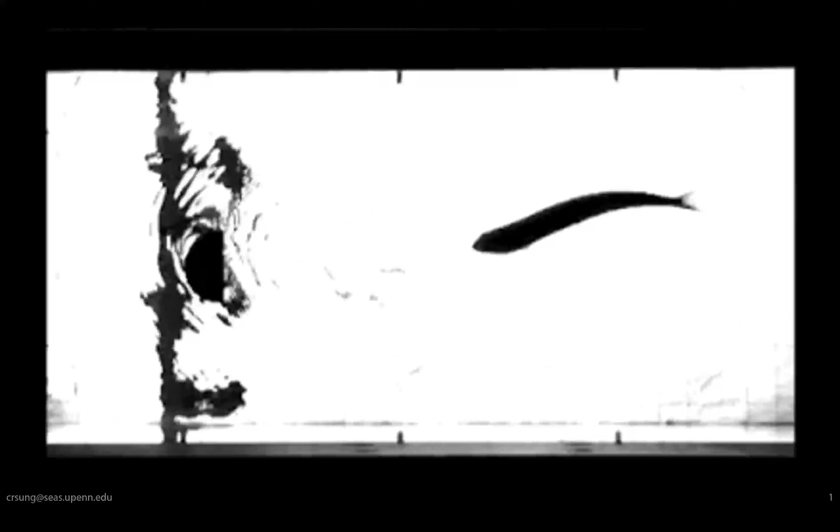So when I show this video... Maybe there's a chance of getting people in the room to use the owl to say things. Manuel, is it on? Or is everyone quiet? The owl is on, but we only have one spectator in the room and the rest are online. Oh, I see, okay, don't worry about it. People online should feel free to jump in, and if you have questions throughout the talk, please feel free to interject. I don't mind, but I'll just keep going.

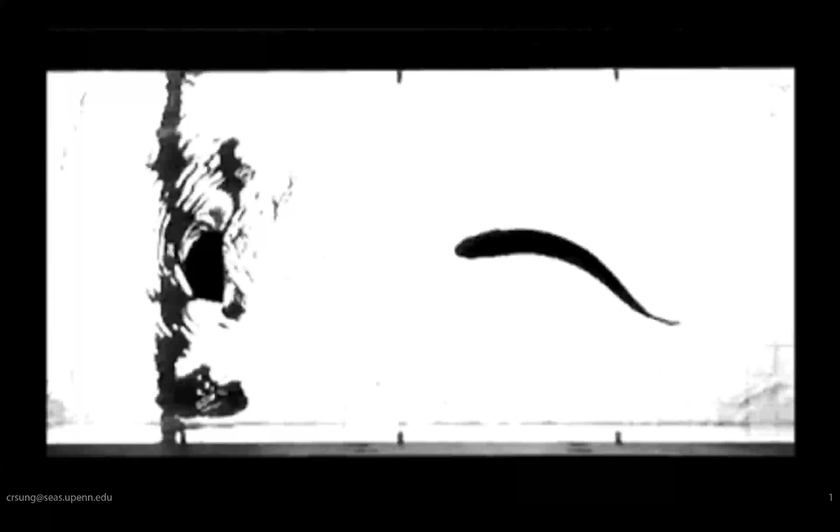When I show this video, a lot of times with no context, people say this is a black and white video of a fish, swimming upstream, hitting this rock, getting thrown off course, and then restarting. But what I want to do now is show you the title of the paper this video came from: Passive Propulsion in Vortex Wakes.

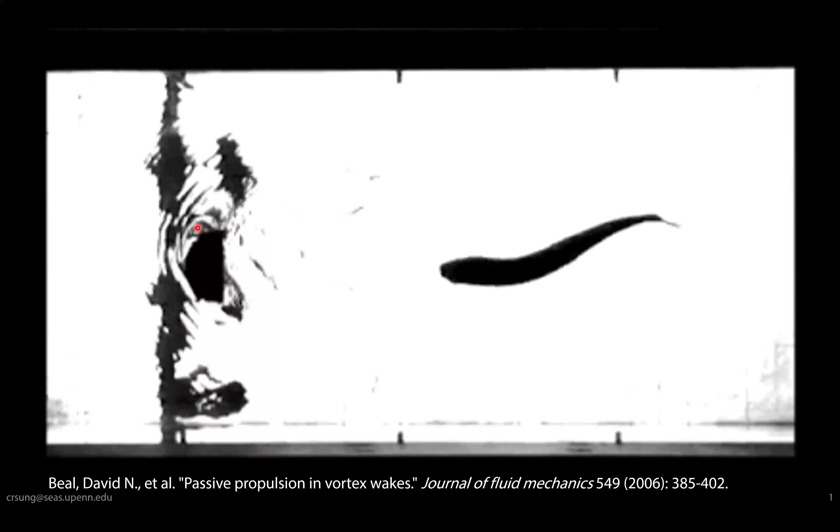This was a piece of work from 2006, where this is not just a fish that's swimming, this is actually a dead fish. What's happening here is that this fish is attached by a string at its nose to a point on a fake rock, and there's a flow being generated in this environment. The interaction between the flow and the fish's body creates this oscillating motion that, with no active control and no actuation at all, allows this fish to swim forward.

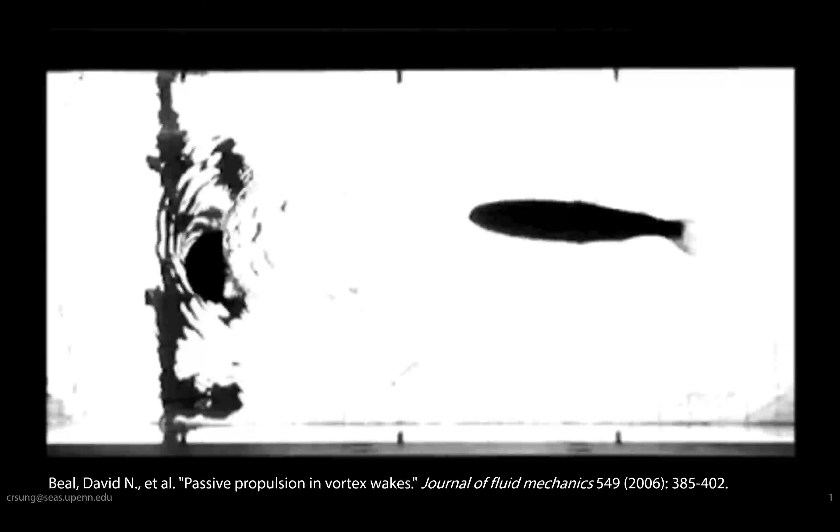So there are really fascinating questions here about how we can get efficient swimming, efficient underwater robotic locomotion, by taking advantage of really good design.

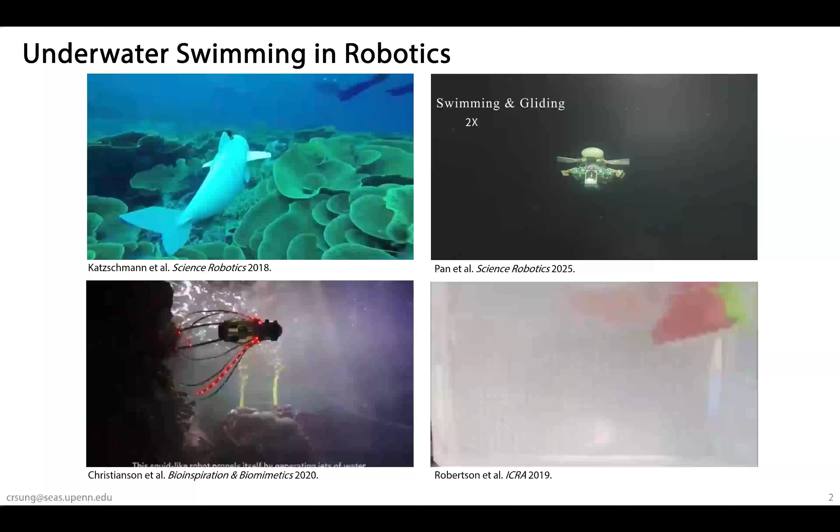In the context of underwater robotics, there have been quite a few pieces of work, including those by people in this room, looking at how we can create new mechanisms, new actuation strategies, and new control strategies for getting robots to move around in 3D underwater environments. A lot of these works are biologically inspired, many have soft components, and many have really complicated actuation structures that allow them to create motions mimicking what we see in biological systems.

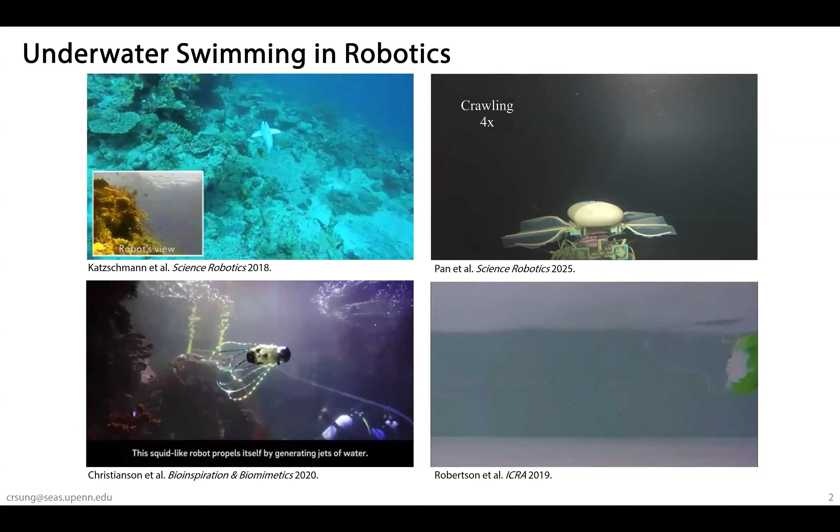At the same time, designing underwater systems is really challenging precisely because of how the robots need to interact with this fluidic environment to do these tasks—not just succeed at them, but succeed in doing them efficiently and agilely, in ways we can actually use for real robotic tasks. So the premise behind the work we do in our lab is really about this interaction between the robot and the environment.

In particular, we believe that robust and efficient task execution comes from the interaction between the two. Generally, when we think about robotics, for example in a more commercial or industrial context, you have the environment and the robot, and we think about planning and design in terms of how we get the robot to do work on the environment—how do we get it to do pick and place tasks, how do we get it to navigate around obstacles, that sort of thing.

But in a lot of locomotion tasks, the environment also has a huge impact on the response from the robot itself. This loop between the robot and the environment requires us to be able to reason about it, which is key to designing these sorts of systems.

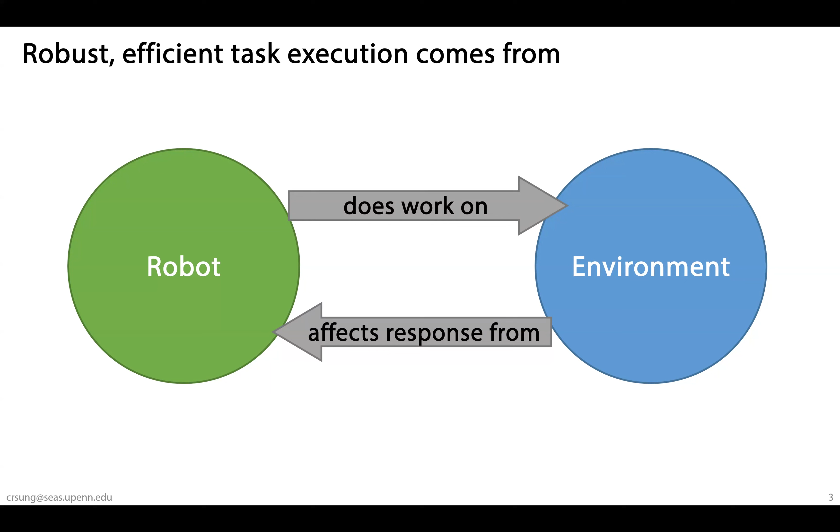So we take a look at this loop. This is what we call embodied intelligence. And in particular, when we think about computational design or co-design, or just how we approach trying to create these sorts of systems, we want to reason about how we manipulate those responses.

So going back to this video, the sorts of questions we think about in our group are really about trying to manipulate this interaction. The questions we think about are: what is the shape and morphology that is useful for this, for whatever task we care about? In the context of this fish, there is a particular shape it has evolved into that allows it to be streamlined, reduce drag, and create these oscillating motions in its body.

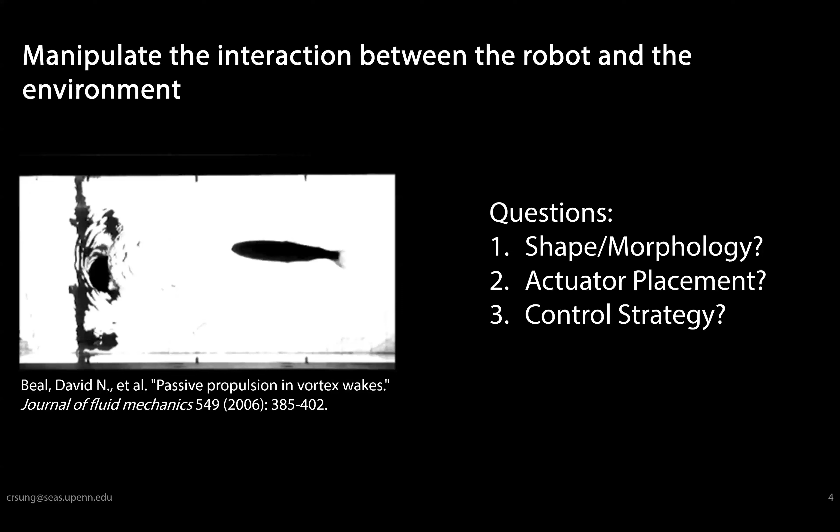There are questions that have to do with what actuators we need to use, where those actuators are placed, how many are required to get the sort of motion we care about, and what control strategies are associated with the actuators and the higher level design of the system.

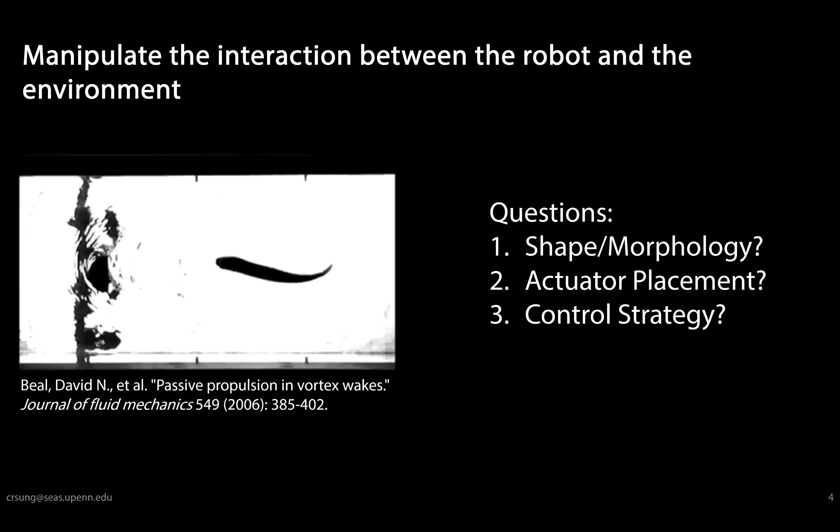Our lab has investigated these questions in the context of many different platforms, usually looking at pairwise interactions between these elements. We've done some work in origami-inspired design, where we can embed electronics, actuation, and sensing directly into the robot body. But then there are really interesting questions about how the mechanics of the robot change when you embed those components, and how that affects your actuation strategy.

We've done some work in how we can co-design over the mechanics and control of a robot. What you're seeing in the bottom left is a legged platform, where we've been interested in how we can tune the compliance of an origami structure and how that affects the robot's passive response to a ladder-like environment. We can do passive grasping as a robot might be jumping or running over this sort of terrain.

We've been looking at questions in actuation and interaction between robots on complex environments. This is a sandy environment meant to simulate lunar terrain, where we have two robots connected to each other, attempting to use an arm between them to apply forces to each other and help each other.

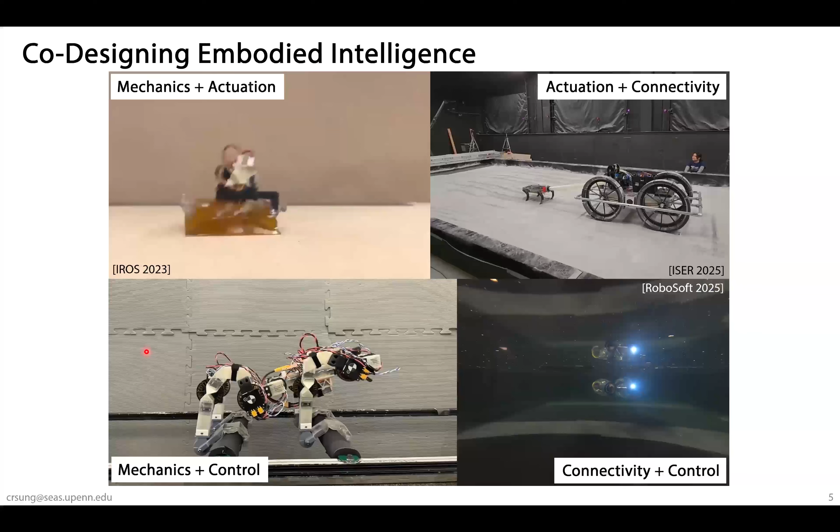Oops, what is going on here? Sorry, my computer was spazzing out a bit.

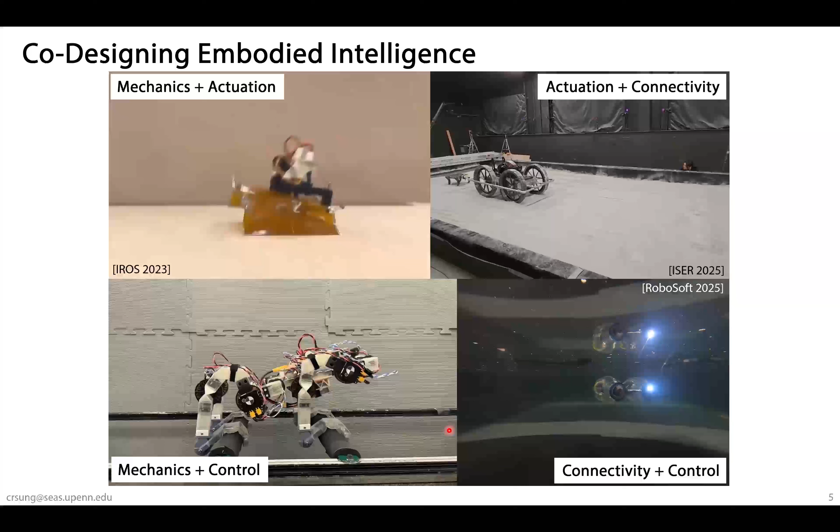A lot of times when I present this work, students ask, well, where do these platforms come from? And how do we know these are the platforms we want to use to answer these questions? Honestly, the answer is that a lot of these projects come as a result of conversations and really spontaneous interactions with other researchers.

So where we started a few years ago was not really in underwater robotics at all. Our group originally worked almost exclusively in origami-inspired design. At the time, we had been thinking about how we could design more robust, larger scale origami structures compared to a lot of the origami robots that existed, which were restricted to about the centimeter scale. So we did some work in origami mechanics.

It turns out that in order to tune the compliance of an origami structure, you can take advantage of ideas from computational geometry that tell you that for certain types of structures you might want to fold, there is a requirement that there will be stress, or strain in the faces of the origami pattern, when you deform that pattern. There's a class of origami structures that are what we call rigidly foldable, where you don't have any deformation in the faces.

And there's another class which are non-rigidly foldable, where strain is required in order to deform. This is known as the Bellows theorem, where if you have these enclosed polyhedral surfaces and try to compress them, no matter what you do, you cannot design a rigidly foldable structure. It turns out that you can actually design and model these structures to change the force response when you apply that sort of deformation.

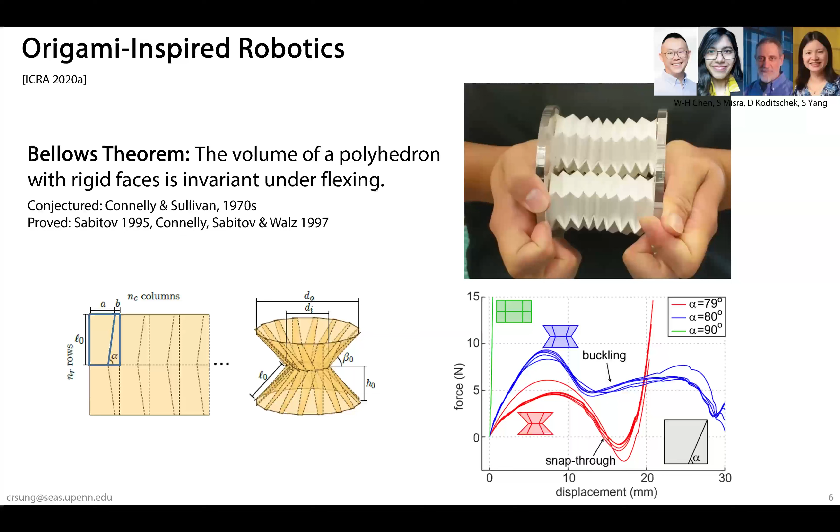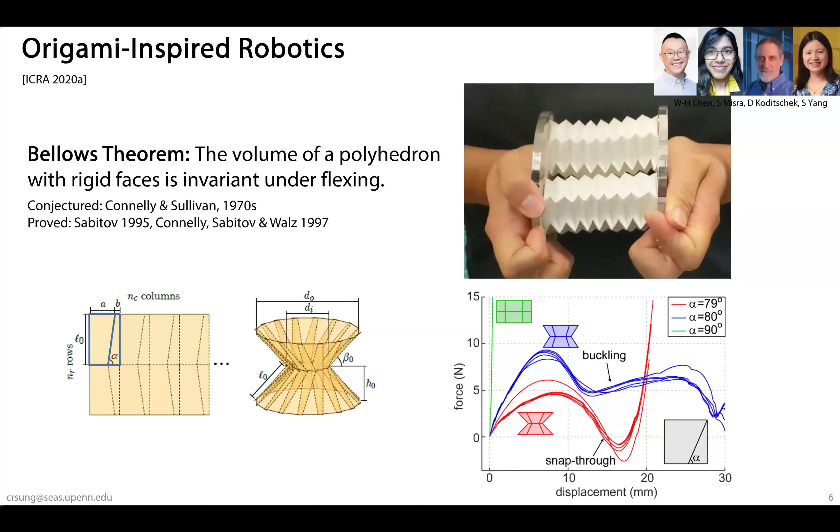So we had been exploring this idea in the context of legged robots, trying to see whether we could store and release energy into these robots with enough speed and power to get kilogram-scale running and jumping. But at the same time, there was another group in Korea looking at a completely different pattern.

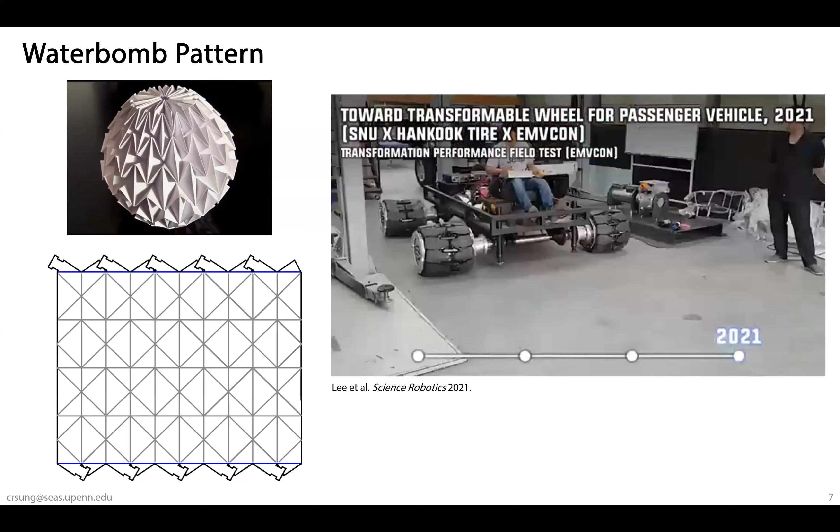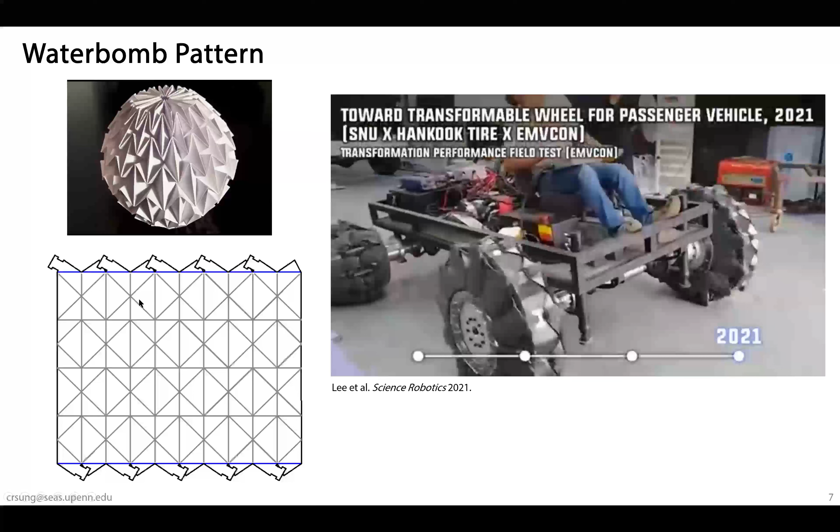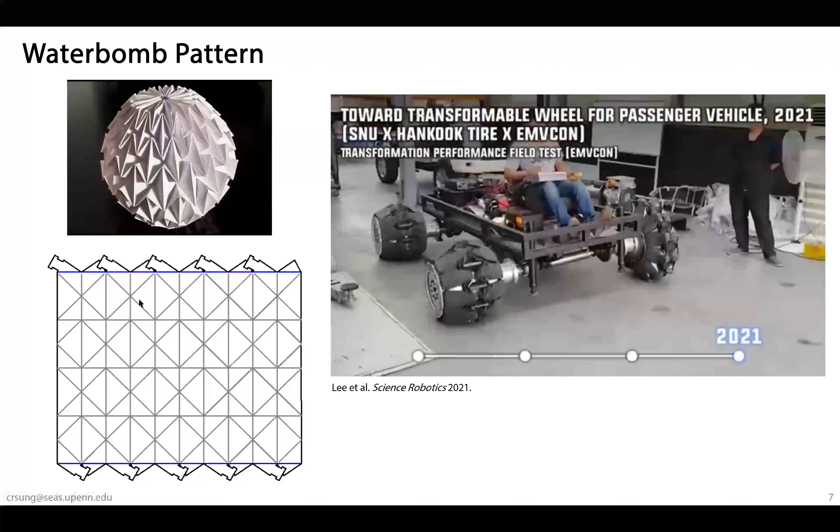This is the magic ball pattern, a tessellation of waterbomb units. They were designing transformable wheels to also scale up origami design, in this case for the purpose of designing a car. We looked at this pattern and said, this is actually also subject to the Bellows theorem, where you see that it's an enclosed polyhedral pattern.

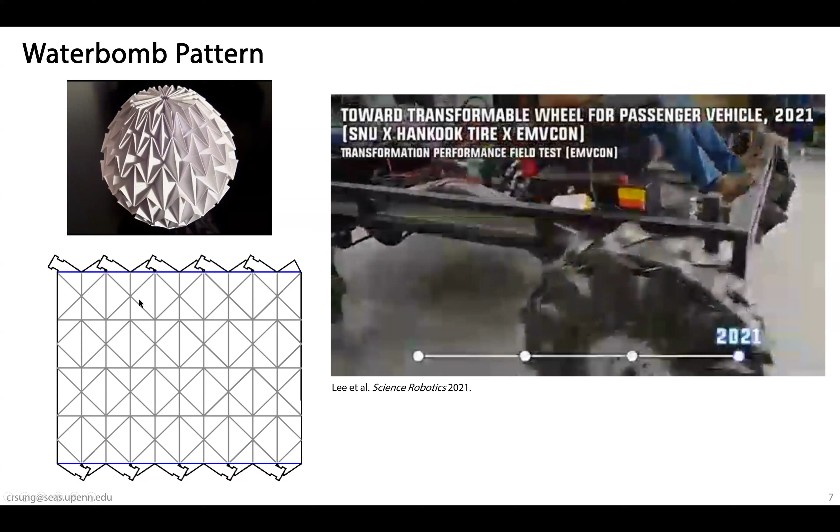It's being compressed lengthwise to get this wheel to grow and shrink, which means this pattern is also subject to these ideas of storing and releasing energy into the pattern itself. One of the students in my lab became very interested in this pattern.

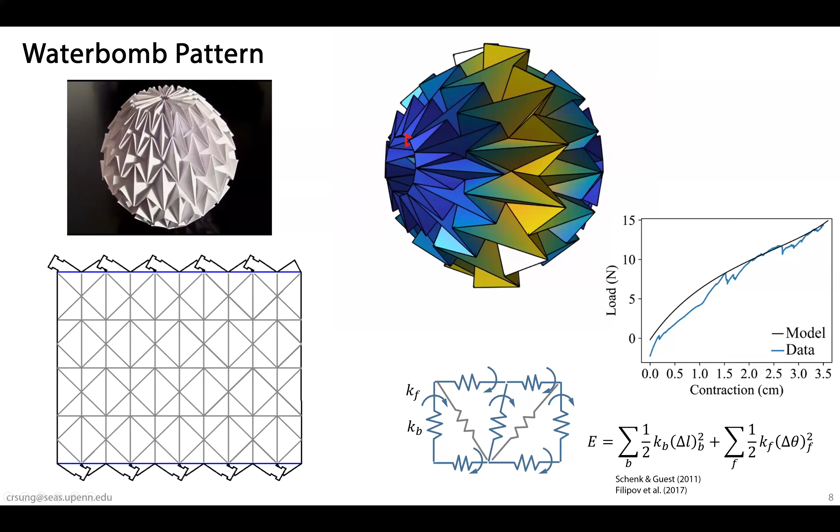So they got very excited about this and said, let's see whether we can turn it into something interesting. It turned out that what they were interested in creating was an underwater robot.

So this is the magic ball that we had four years ago now, where they designed this tube that had a DC motor and a spool inside. The spool is connected to a tendon that exits the tube through this side, and then connects to an end cap that we attach to the other side of the magic ball.

What you're seeing down here is the actuation structure. So we have this DC motor, this spool. This spool has teeth on it. And so by moving this spool out and in, you can engage or disengage the teeth.

What happens then is that when the teeth are engaged and the DC motor turns, you can contract the magic ball. And then when you disengage the spool and release the teeth, because of the natural mechanics of this magic ball, it will passively return to its extended state fairly quickly.

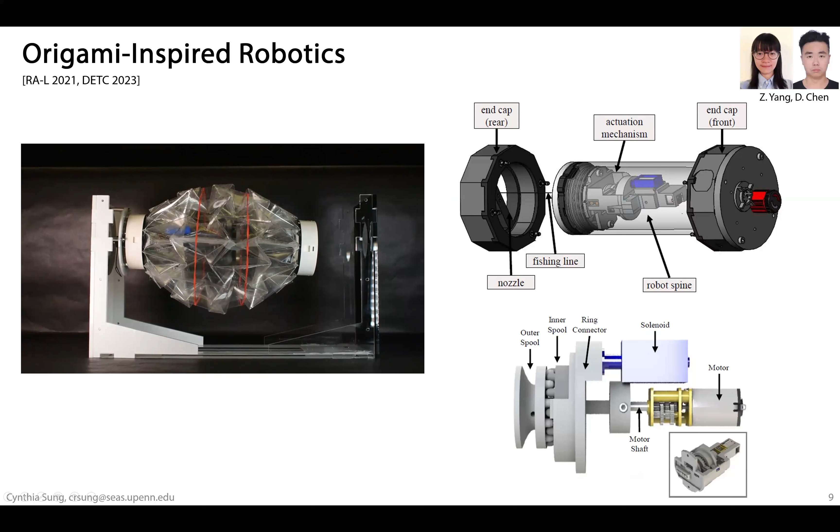What's also really interesting about this pattern is that during that process of compressing and expanding in length, the volume changes. So now when you put this robot in the water, you can get this jet-propelled swimming.

So this was the first version of our underwater robot that we built, where we had this magic ball pattern made out of PET plastic. We laser cut the pattern by perforating where all the folds were, then folded it by hand and attached it to this actuation mechanism. You can see here that it's able to contract and then release very quickly to create this jet.

This bar that you see at the top is just a radio that we were using to stream the data back so that we could actually measure its performance.

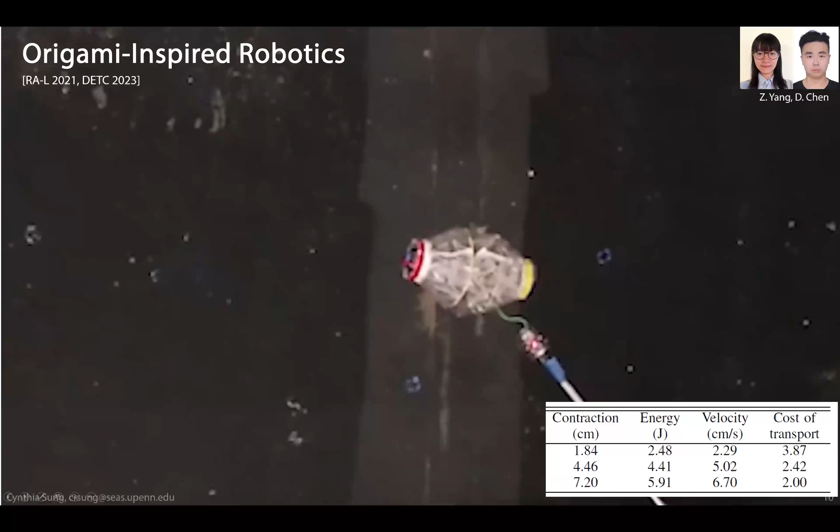The robot is fully untethered and able to execute this jetting motion on its own. When we measured the velocity and cost of transport of this robot, we were surprised because it turned out to be very similar to squids of the same size. So we were really excited and asked, are there other interesting questions we can answer in underwater propulsion?

Of course, you may be looking at this robot and saying it's not very good, because the use of the origami skin gives us this nice feature of creating the jet through the passive mechanics of the skin. But actually this skin has a lot of divots in it, which increase drag.

So the very first thing we did while trying to enhance the system was basically get rid of the origami design. So even though this project started as an origami-inspired project, it no longer is. This is the new version of the robot, recently presented at RoboSoft, now with an elastomeric skin with bending beams, using the same actuation mechanism where we spool to contract the robot in length, then use the passive mechanics to quickly create the jet. Because the skin is smooth, we automatically get much higher velocities and much lower cost of transport. So this is the state of the robot right now.

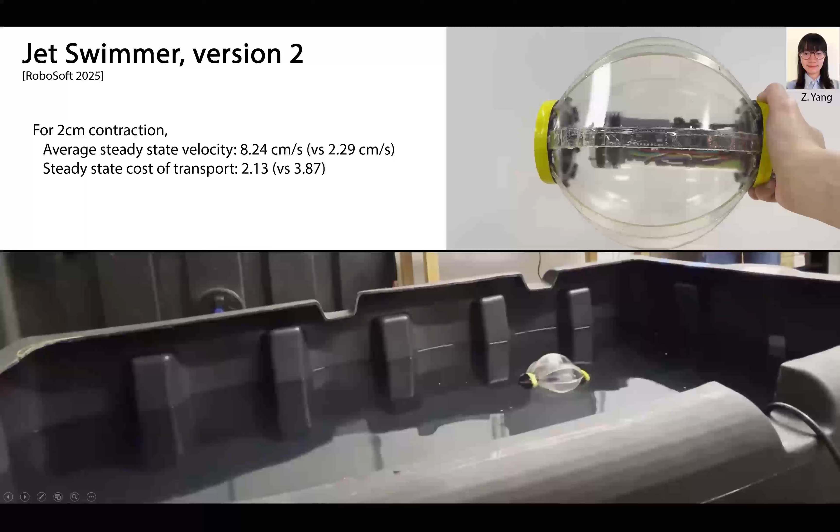At this point we're in this space of underwater robots I showed at the beginning, where this is just another mechanism you can use for swimming. So the question is, what do we want to do with this system? This is where conversations with people who aren't necessarily in robotics come into play, because we showed this video to a colleague in my department who really likes surfing.

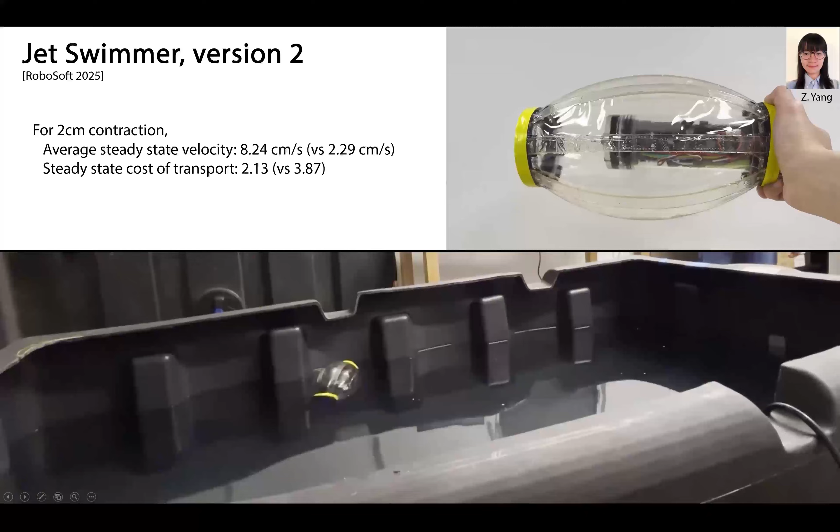And he said, this robot looks very much like a salp. Salps are these underwater jellies that are tubular. Their bodies are basically entirely soft, and they have a front and back aperture where they suck in water through the front and expel it through the back. So the water flow looks like this. They have a membrane in the middle that they use to filter the water and to feed. This process of moving water through their body is used both for locomotion and for feeding.

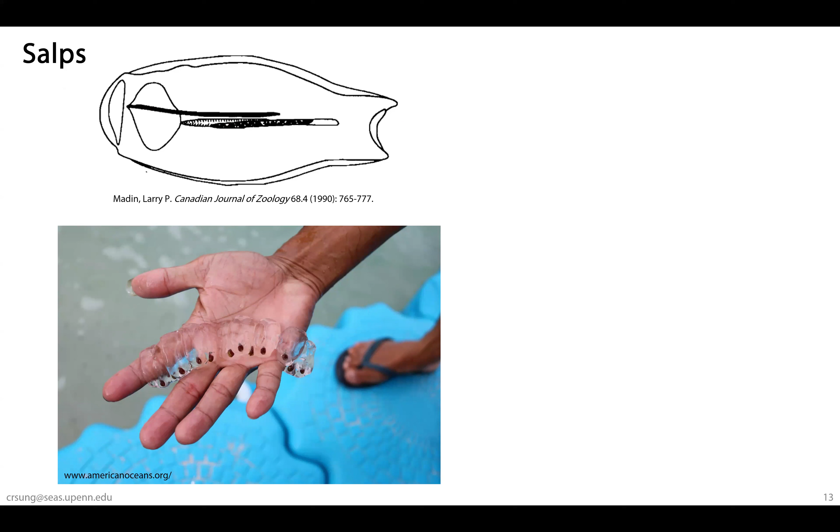What you're seeing down here is a picture of salps on a person's hand, so you can get a sense of scale. These creatures are somewhere between 1 and 10 centimeters in length, and they're considered some of the world's most efficient jet-propelled organisms.

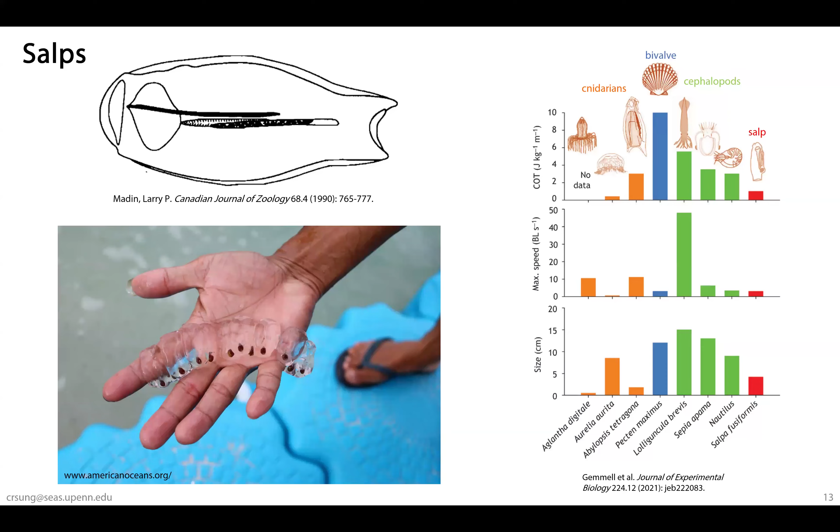When you look at a salp as a jet-propelled swimmer, they can swim in solitary mode, but they can also swim physically connected to each other. These colonies are actually the way that they reproduce. When salps reproduce, they make copies of themselves attached physically to each other, creating really long salp chains up to hundreds of units long, and swim as a group.

Now, they are actually individual organisms with their own nervous systems. They have the ability to detach, and they do detach when they're trying to escape from a predator, for example.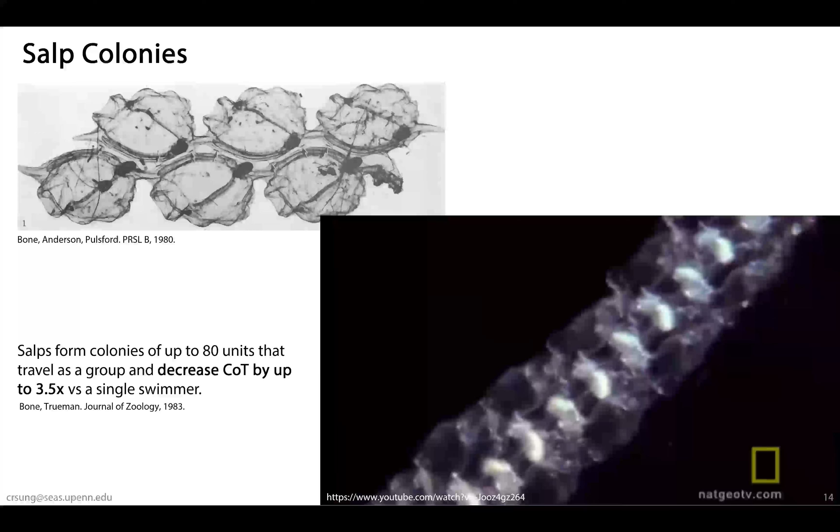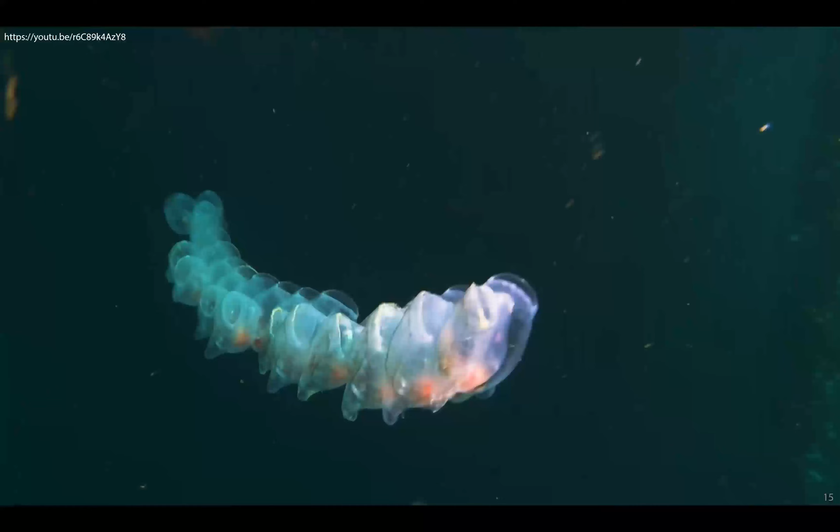When they are attached together, they exhibit really interesting locomotion modes, in that they jet, but don't necessarily jet all in synchronicity. So I'm going to show you another video of a salp chain.

There's some really interesting control insights we can gain from observing this video. One is that there's a really long chain with a lot of units creating these jets, and this chain is not uniform. In robotics, we often think about symmetric designs, maybe lattice structures, which allow you to be very optimal in your design. But in this chain, there are units missing, and not all units are perfectly aligned with each other.

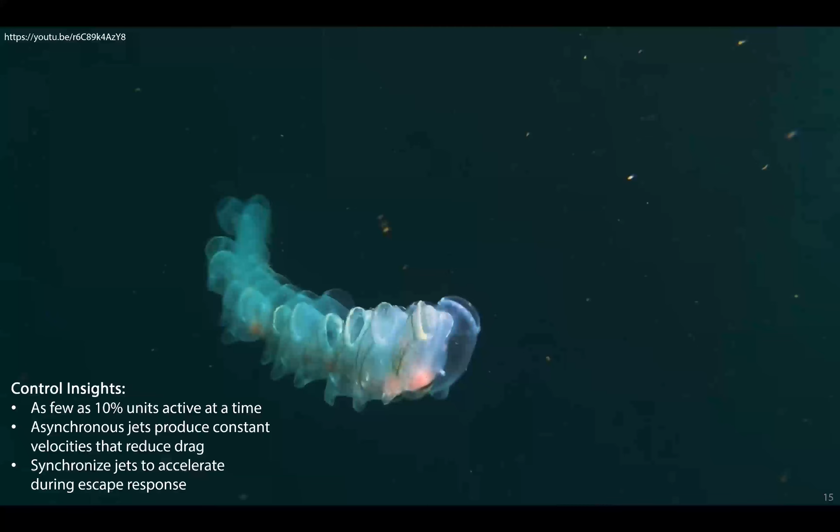And yet this chain still moves effectively. The other thing you might notice is that not all units are jetting. In these systems, even though the whole system has 80 to 100 units, as few as 10% of them are jetting at a single time, meaning the rest are just hanging out and along for the ride. This allows the entire system to potentially lower its energetic cost.

The third insight I want you to notice is that the ones that are jetting, that are active, are not all jetting at the same time. There's this other very common mode of control in multi-robot systems, which is that we want everybody to synchronize, or reach consensus. We think that figuring out how these robots can reach consensus will allow us to get better or more interesting performance in a multi-robot system.

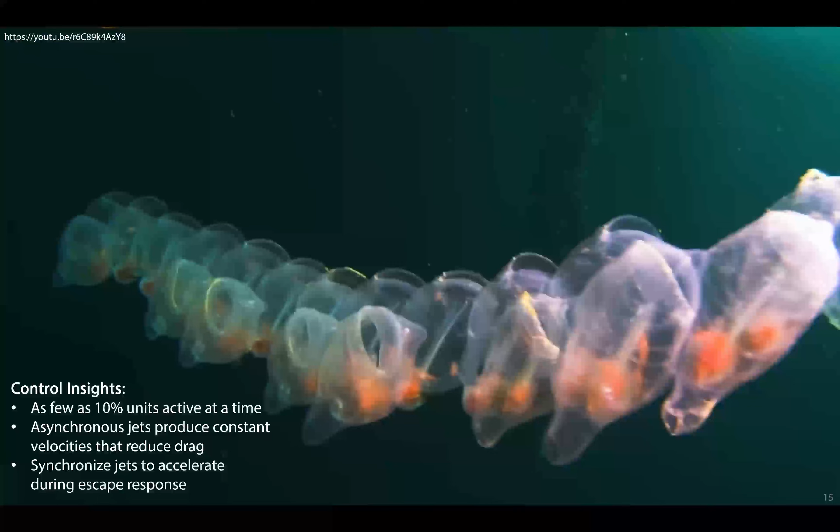But actually in these sorts of underwater systems, these biological systems don't all jet at the same time. These are interesting features of biological systems that may tell us something about how we can manipulate the interaction between swimming units and the environment.

I'm bringing back this slide that I originally showed for fish, but all these same questions apply to this salp chain: a question of shape and morphology, like how many units are actually required for this sort of system to be effective, and actuator placement — what are the physical arrangements of units connected together to create these chains?

And in terms of control strategy, what is the level of coordination that is required? And if coordination is required, since it's not about getting all of the units to synchronize, what is that coordination?

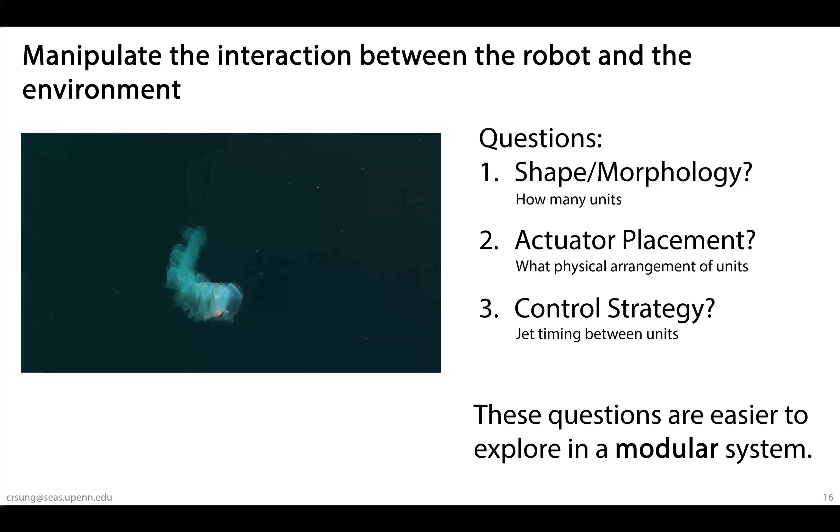These questions are, I think, much easier to explore in a modular system than in a fully integrated fish robot, in the sense that now we can take individual jetting robots, connect them to each other in different ways, and explore these questions without having to redesign the entire thing. This is how we started on this quest for understanding multi-jet locomotion and the interaction between the robot and the fluid.

One interesting observation we've had along the way is that there's a relationship between work happening in multi-robot systems and work happening in soft robotics, in the sense that I transitioned from fish to salps. If you think about this salp colony as having a single control system, it's basically like an eel-like structure, with distributed actuators throughout the entire colony.

How do we think about shape or design? How do we think about actuator placement and actuator design? These are questions that show up both in multi-robot systems, where there's been a long history of work, and in soft robotics, where we may not have thought about those questions so much, but we can learn from multi-robot systems to make more efficient designs. So we want to explore these sorts of questions.

We've been gaining a lot of inspiration from biologists. It turns out that in the United States, at least, there is really only one salp biologist. Her name is Kelly Sutherland. She's been looking at these multi-jet systems for years, trying to understand how the number of units, the coordination between units, and the morphology of units affects their motion.

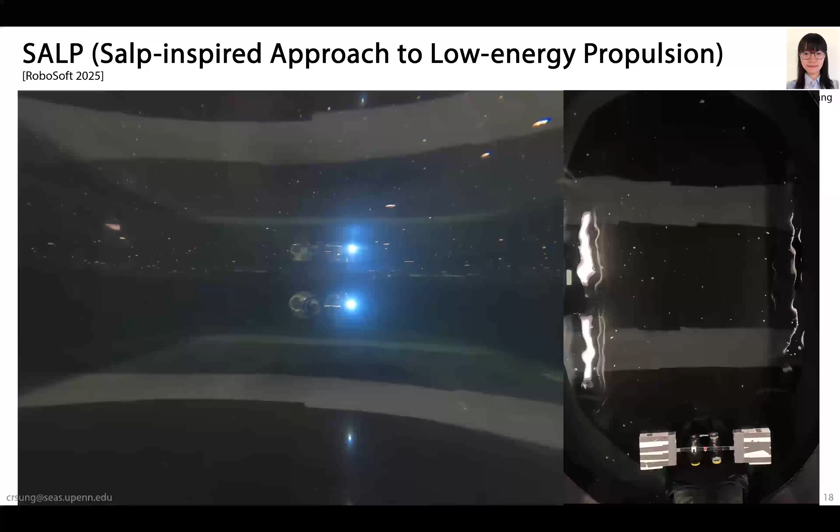So we rebranded the project. It's called the Salp now. Salp stands for Salp-Inspired Approach to Low Energy Propulsion. We're trying to see whether, with this two robot system, we can see similar effects in the coupled interaction between physical arrangement and jetting control.

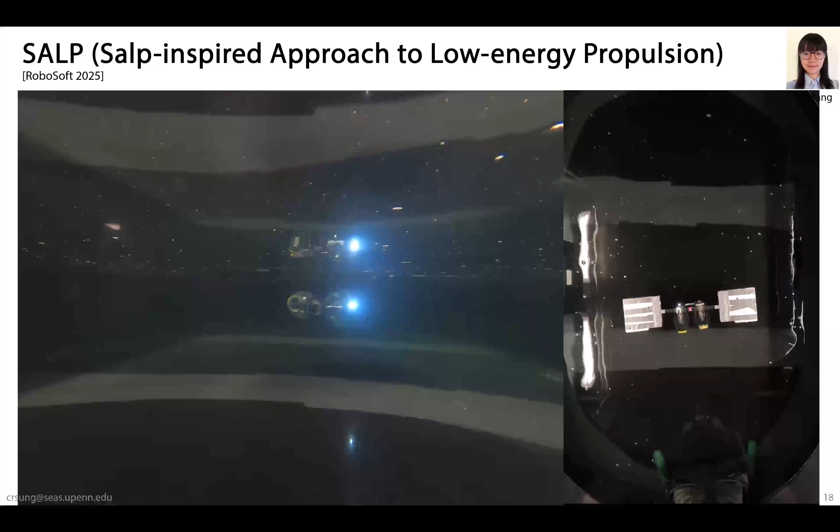So this is the robot, two of them connected to each other, swimming underwater. What you're seeing on the right is an overhead view of the robot swimming in our tank. This robot naturally floats, so we have to weight the system down and put it on a piece of foam just to make sure it stays basically so we don't have to deal with buoyancy control right now. We can really just look at the effect of jetting.

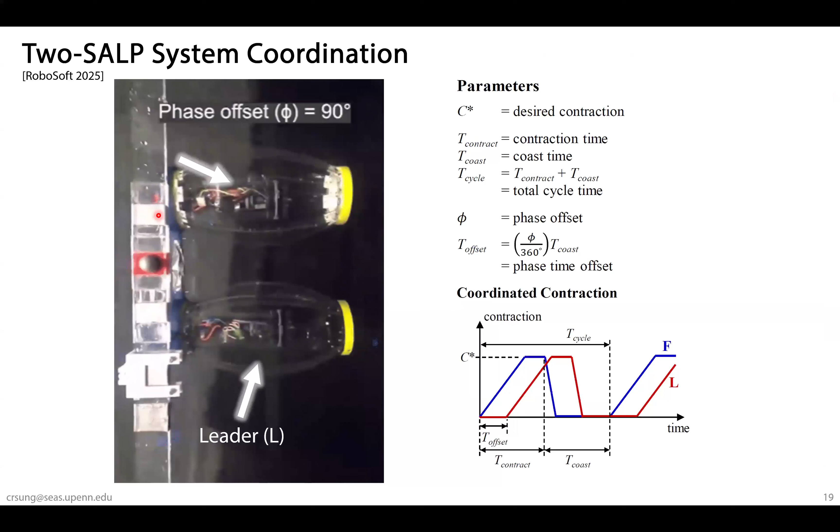The way we're connecting these robots together is by putting this rigid attachment in the front. There's a collar here that we're using to attach the front of the two robots. Through this collar, there's also a wire that connects the two robots electrically, through which they can communicate with each other and set their phase offset.

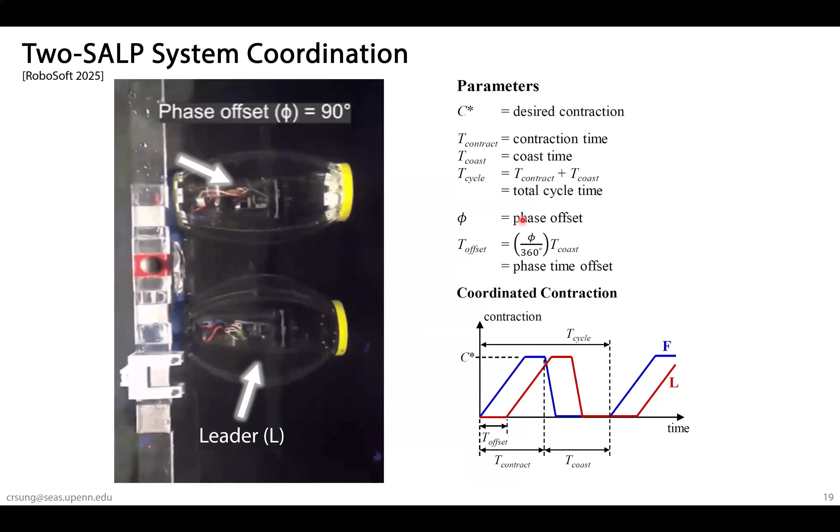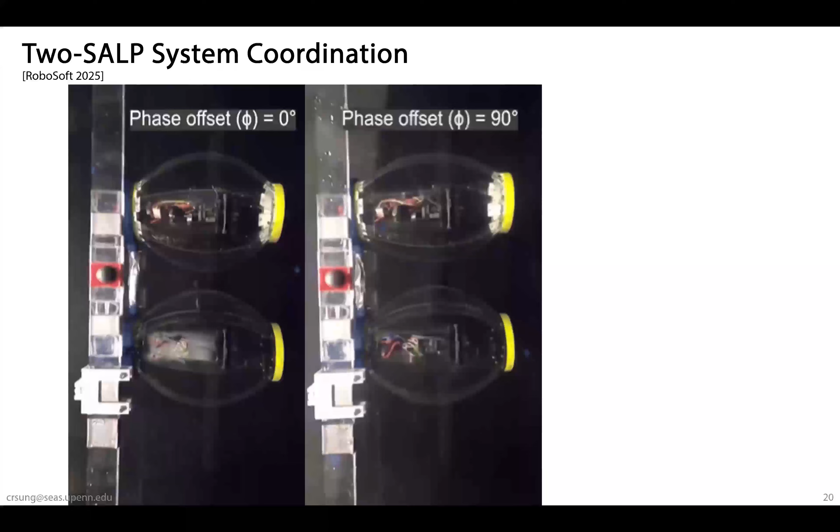Each of the robots is executing this cyclical motion of contracting, holding, and then releasing. This release component is the robot creating the jet. We have a leader robot, which sets the timing for the jetting cycle, and a follower robot, shown in blue here, which lags by some T offset, which we also indicate by phase phi. A phase of 0 degrees means the robots are jetting exactly in sync, 90 degrees means they're a quarter of a cycle off from each other, and 180 degrees means they're jetting exactly out of phase.

Now we can take the system, put it in a tank, and see the result on swimming performance. What you're seeing here is side-by-side comparisons of these two robot systems swimming. You should notice differences in speed, so some of them are swimming faster than others. There are differences in turning, so some are a little bit better at swimming straight than others. And there are also some systems that are oscillating more or less than others.

We've done this experiment over multiple trials and extracted average performance metrics. What we find is that the steady state velocity, power consumption, and cost of transport all depend on the phase offset for these two robot systems. Velocity and cost of transport have to do with the interaction between the robot and fluid, so that kind of makes sense. But what I found really surprising is that the power consumption, this is electrical power consumption from the motors in the robot, also changes as a result of this phase offset, meaning whatever is happening between the robots and the flow is increasing or decreasing the power and force the onboard motor needs to generate to create this locomotion.

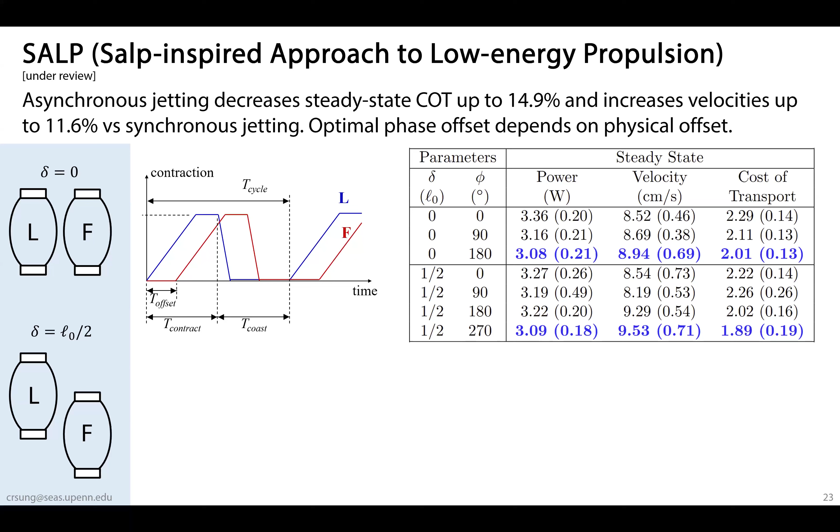Talking with Kevin, they haven't really taken a look at this in the salp colonies, because they just look at whether the units are synchronized or not. It's difficult in biological systems to really tease out the effects of morphology on these different units.

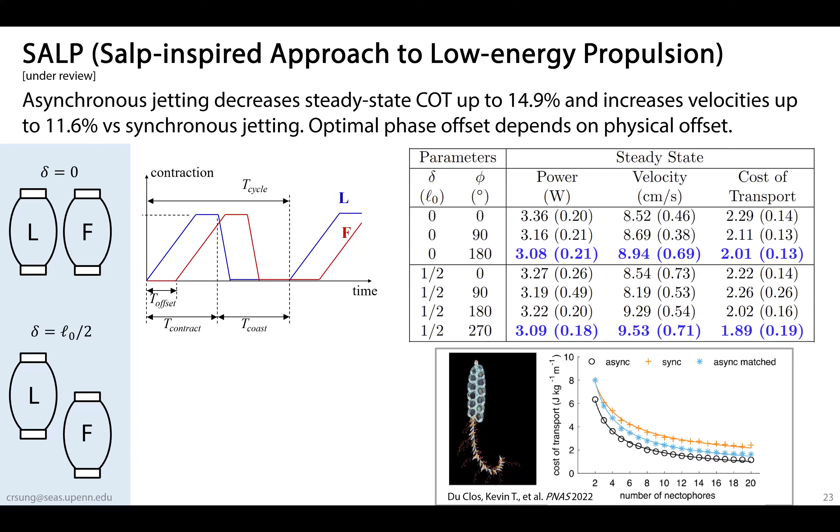So we wanted to investigate this idea further, and looped in one of the fluid dynamicists in our department who said, let's take a look at what the fluid flow looks like. These, I think, are our most interesting results from this project.

So we took the robot and put it in a particle image velocimetry system. This is basically a large tank where you drop in a whole bunch of neutrally buoyant, very small particles, then illuminate them with a laser. When you take a video of the system, you can see the movement of the particles as they follow the fluid flow.

So what we think is happening is that as the robots are jetting, these vortices are interacting with each other, and that is actually what's creating the change in performance for the robotic system.

So what you're seeing now is our latest experiments on the two robot system, the aligned system. We have two robots right next to each other. On the top video here is what happens when the robots are jetting in phase with each other.

What you see is also similar to what you see in the single robot system. You see the jet being emitted and traveling to the right. You see these two circulating fields coming off of the jet.

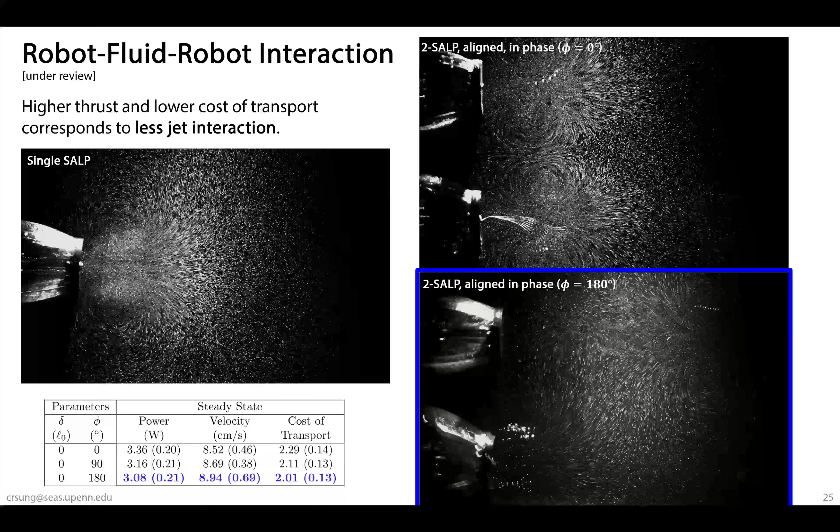I'm not showing here the measurements from the 90-degree out-of-phase experiment, but basically it's somewhere in the middle of the two, where you see small amounts of interaction between these jets. At the same time, if this is the reason for more energy-efficient locomotion, it would make sense that when you have a physically offset system, the ideal control input would change.

So what you're seeing now is, on top, the aligned system, and on the bottom, the one where the two robots are about half a body offset from each other. What we found serendipitously is that the speed of the jet is about half a robot body length per second, and the robots have a gait cycle of about 4 seconds. So each second of delay in the gait cycle corresponds to half a body length of movement in the robot's emitted jet. So 90 degrees here is basically half a body length in terms of physical shifting.

So what we're seeing is that in terms of the flow for the system, not the physical arrangement of the robot, but in terms of flow, having the robots exactly out of phase with each other in the aligned system is pretty much equivalent to having them 270 degrees out of phase for the offset system. That is why we're seeing these similar trends in cost of transport and achievable velocity.

Not only that, but I want to note that the performance metrics also change between the different arrangements. What we see is that for the best performing robot in the aligned case versus the offset case, the velocity is higher and the cost of transport is lower when we have the two robots offset from each other. We believe this is because the robot is a little bit longer, so when the robots are jetting out of phase, they're creating the same torque on the system, but the resulting oscillations are smaller. As a result, you have less wasted effort in the offset system.

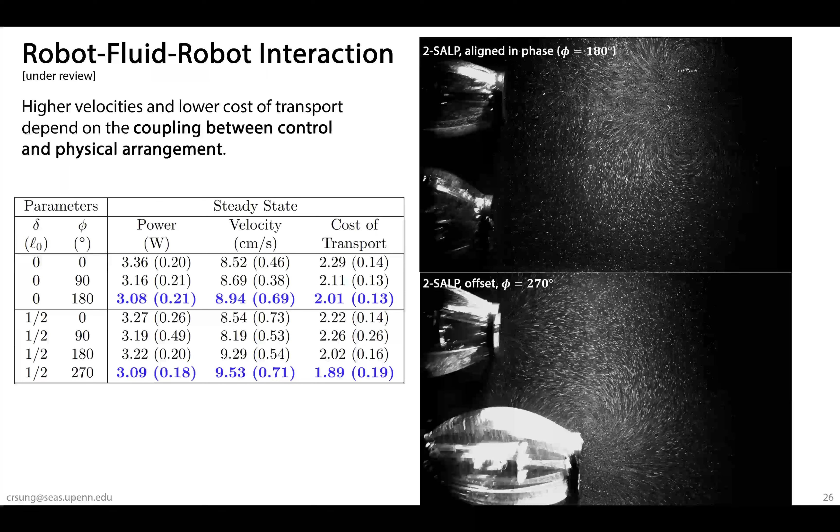This is really interesting when we compare this back to the biological systems, because what we see in Salp chains is not just the chains I showed you at the beginning, but actually a wide variety of different morphologies. The ones I showed you at the beginning were these linear chain systems, which correspond to the half body offsets in our robotic system. But there's a huge diversity of different arrangements, from these transversal systems—this is the aligned system that we tested—to clusters and these whorl systems, where some of these just look very random.

When you look at the biological data, these different morphologies do show trends in some of them being more efficient swimmers and some being less efficient swimmers than others. So what we're interested in looking at now is, if we also take a look at how these swimmers are controlling themselves, does that also show correlation with the results we've seen on the robotic system?

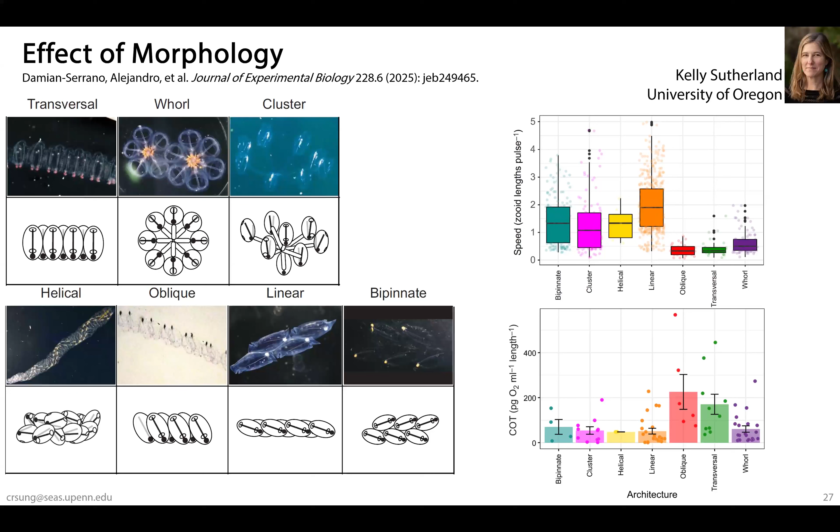One other thing I want to bring up is that these systems are highly nonlinear. You may have seen in our system, we have basically an aperture in the back, which we're using to suck in and expel this jet, compared to Salps, which have an aperture in the front and an aperture in the back that they use to have a more streamlined flow. So one of the things we're trying to do, in addition to these multi-robot systems, is see whether we can improve the individual robot itself.

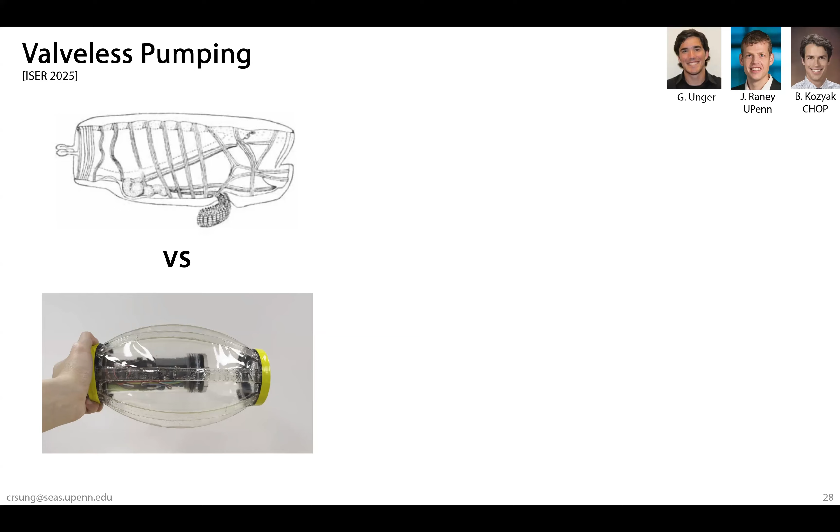Another interesting connection we've made with people completely outside of engineering is that we showed this robot to a cardiologist at the Children's Hospital of Philadelphia, and he noticed that these kinds of tubular pumps are very similar to embryonic hearts. Human embryonic hearts are not these 4-chamber hearts that adults have—they're really just tubes. They work off of a principle known as the Liebau phenomenon, discovered by a German cardiologist in the 1950s, where you don't need valves at all. What you in fact need is just this oscillation of the tube and some very precise mechanical design that combines both soft tubing and rigid tubing.

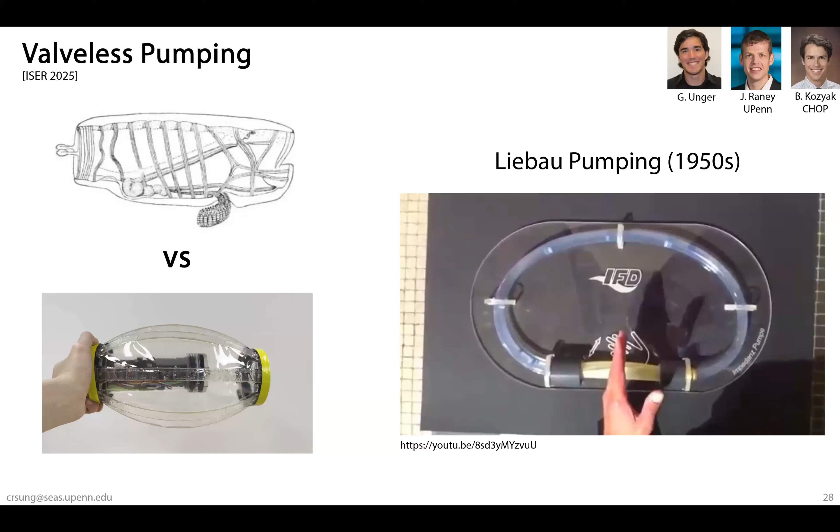I'm going to show you a slowed down video of someone that we took in the lab, where we basically just took this electromagnetic pincher and then pinched this soft tube.

What we're seeing is basically when you have this soft tube, you get a traveling wave of this pinching motion down the tube. When you have rigid walls on the two sides, you can get reflections of this wave that, because of the asymmetry of pinching, allow you to generate flow. This is much more similar to what we see in biological salps, and something we're trying to integrate into our swimmer robot.

What I think is really fascinating is, unlike peristaltic robots where we see a lot of actuators throughout the whole robot body, this one only needs one. Not only that, but when you change the frequency of activation, you can manipulate the flow to be either in the positive direction or the opposite direction. This change in flow does not require any valving or change in actuator position. It just requires knowing something about the mechanics of the structure and the interaction between the structure and the fluid. Of course, this interaction is very nonlinear, so it's difficult to design, but it is possible.

So this is our newest version of our underwater robot. Still working on waterproofing and integrating everything, but you can see it's basically this tube. We have this pinching actuator on the side. When you change the frequency of that pinching actuator, you can get the robot to transition from moving forwards to moving backwards, all without having more than one actuator, just by manipulating this frequency.

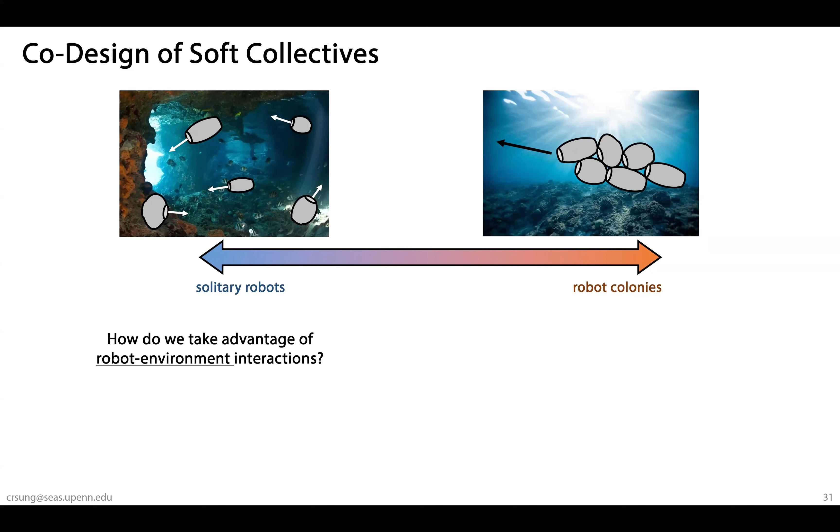Within each of these different modes, there are a lot of really interesting questions we want to explore, having to do with taking advantage of interactions between the robot and the environment. For the individual robot, there's the question of what are effective mechanisms we can use to improve power efficiency—like, is the Liebau effect actually something we can use for swimming?

How do we optimize the robot mechanics to take advantage of those mechanisms effectively, and really, how many actuators and where should they be placed on these sorts of robots to get agile locomotion? The robot I showed you today can only move forward and backwards—we haven't done any steering yet, but that's something we're trying to investigate this summer. When it comes to getting these robots to move in full 3D, how much additional actuation do we need to add versus how much is really just changing the controller?

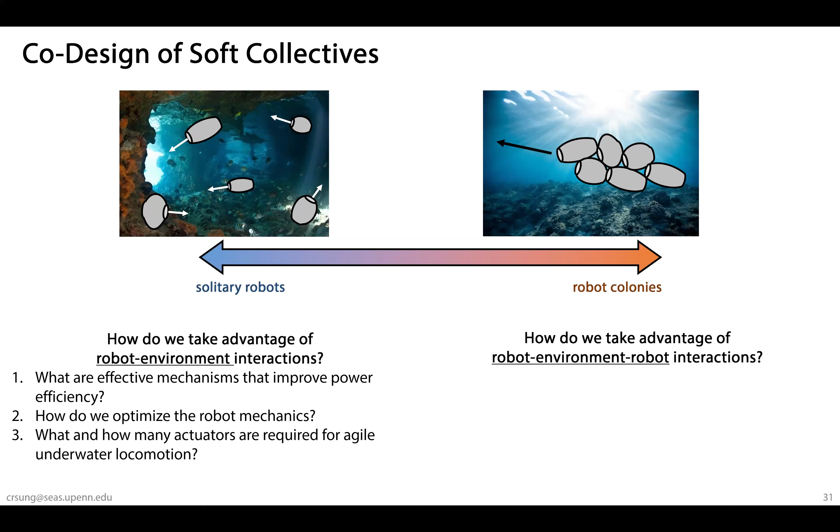When it comes to looking at collectives of soft robots, I think there are even more interesting questions having to do with robot-environment and robot-robot interactions: how does the way we physically arrange these systems and connect them to each other affect their potential for agility, maneuverability, and efficiency? Because that physical arrangement is very much coupled with the controllers that produce this sort of performance in the system. And what is that coupling?

Finally, the last thing I want to bring up is when we have these multi-robot systems, there are also really interesting questions about sensing and communication. If you look at the multi-robot literature, a lot of it assumes wired or active communication, actively telling each other your pose or decisions to reach consensus. But in environments where your robots are affecting fluid flow, and another robot nearby can sense that flow, communication doesn't need to be active. You can communicate through pressure waves in the environment, and robots can figure out what other robots are doing to time their jets accordingly, potentially without any active communication at all.

So this is our agenda for the next few years. Over the course of the last few years, we've learned a lot about soft robot design, a lot about multi-robot systems, and also a lot about fluid dynamics, which I never thought I would have to do when I started in robotics, but it's really opening up a lot of interesting questions in this space.

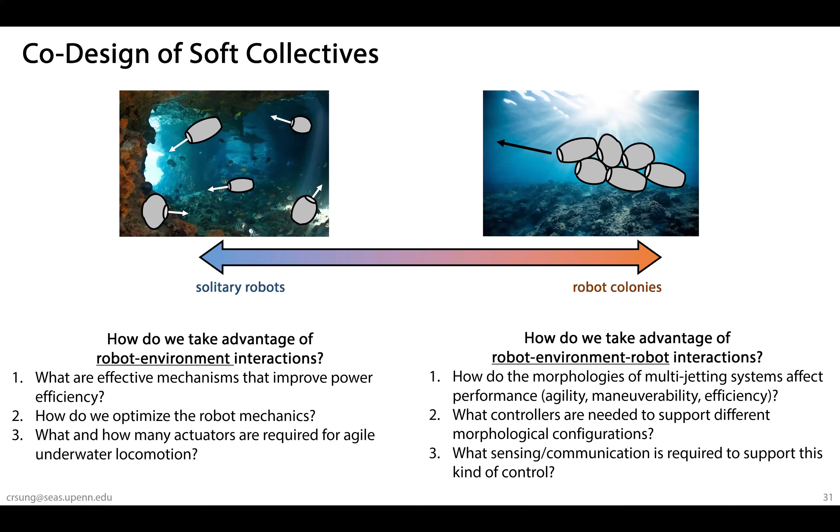Before I close, I want to thank the people who've worked on these projects, of course the students who did all of the work. Annie Yang is the PhD student who is leading our Salp project. Gabe is the one who's looking at the Liebau mechanism, and Dongsheng is looking at fluid dynamics models, as well as help from a lot of undergraduates and master students, and of course our amazing collaborators. And with that, I'm happy to also answer any questions.

I can ask a question, right? Can you hear it? I can't really hear you, so if you could get closer to the mic, that would be helpful. Okay, maybe not. Maybe. Is this better? Yes.

Yeah, perfect. I have two questions. First one is, when you start going from robots to robot colonies, do you think you would need another definition for cost of transport, or would the one that is being used still be applicable?

Sure, we're using the same one right now. The definition we're using for cost of transport is electrical energy consumption over the weight of the robot times its average displacement, so over one gait cycle. There's also a lot of oscillation in the system, so we're not doing instantaneous displacement. I think this is the same cost of transport that we use for the single robot and for the colonies, and we are planning to use the same cost of transport metric.

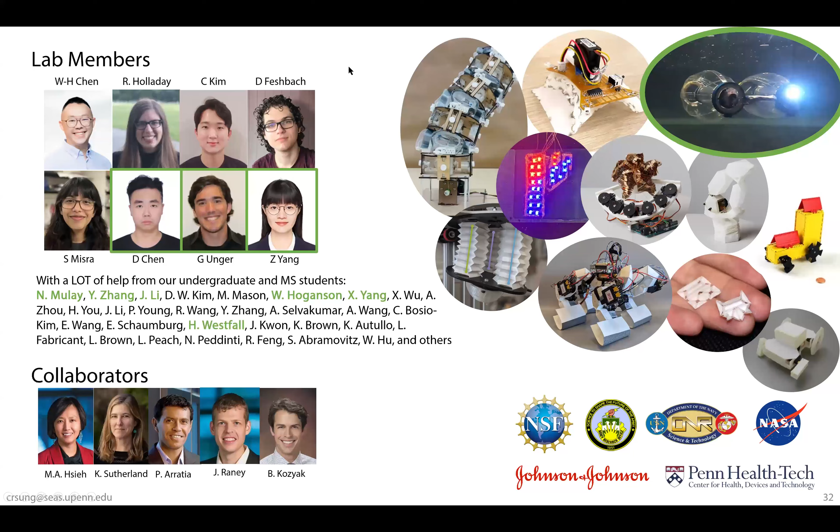One of them has to do with the first point you brought up, which is what kinds of collaborative jetting patterns are needed and how they change as the number of robots increases. One thing I showed during the slides was this comparison of swimming between different phases for the robot system, and you saw these oscillations in velocity. This is because for a 2-robot system, when you're creating these pulse jets and the timing between the jets is large enough, the system will periodically accelerate and decelerate.

When you have more robots and can space the jets more closely together in terms of timing, you can start to smooth out these velocity profiles. What we see in salp colonies is that the velocity curves are pretty much flat, because you have units along the entire chain that are jetting pretty much all the time. So we think these patterns will only become more apparent when you have more units.

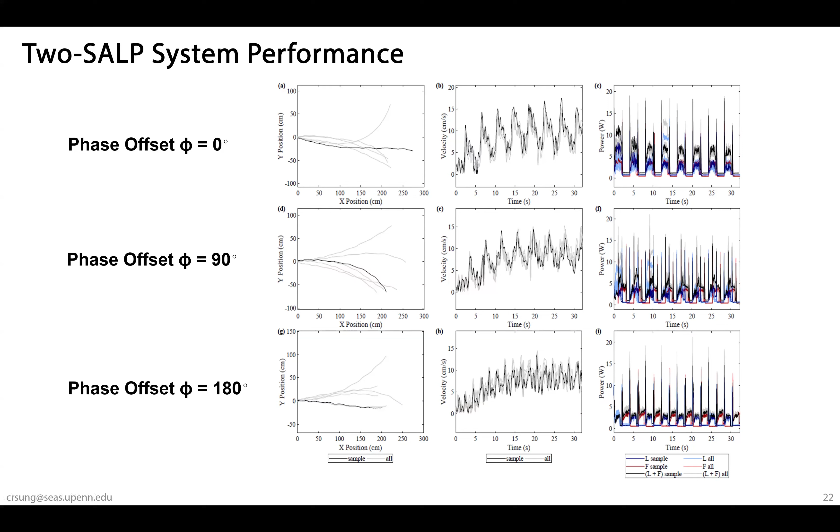This is also in line with these models that Kelly's group has created, where you also start to see more magnified effects, even with very similar control strategies.

For the second question about physical arrangement, controllers, and fluid interaction, which is more important? Honestly, they're all coupled. When you change the physical arrangement of the system, you change the way fluid interacts with the colony. When you change the control, you change the timing of forces and therefore the physical arrangement of these vortices.

The fluid interaction is what couples the two. Based on the preliminary results I showed today, our hypothesis is that for the most propulsion efficiency, you want to minimize interaction between jets. What that potentially means is that the robots which are really close to each other might be the ones you choose to keep inactive, so they never interfere with their neighbors, while the ones farther away can jet simultaneously.

Nobody has done this study on salp colonies yet, but I think it would be fascinating to look at videos of these colonies and ask: is their jetting random both in space and in time? When we look at correlations between randomness in space and randomness in time, is it actually not random? I think that will tell us something about propulsion efficiency, taking this fluid interaction into account.